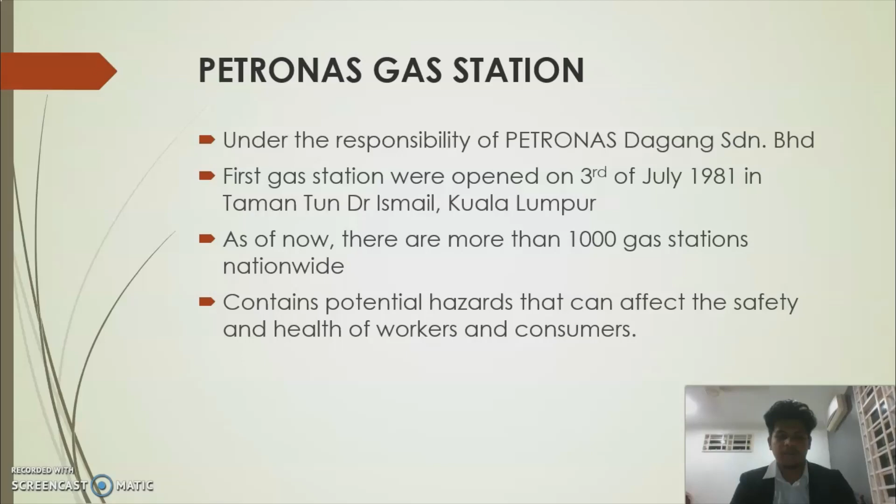Referring to the Petroleum Safety Measure Act 1984, Section 45 prescribes the procedure, equipment, and materials to prevent or extinguish fire in any place. The procedure to use the fire extinguisher is usually located at the body of the fire extinguisher: first is to pull out the safety lever pin, second is to aim the nozzle, and third is to squeeze the lever.

Referring to the Occupational Safety and Health Act 1994, Section 18 requires the equipment to be maintained and repaired. So the fire extinguisher is usually maintained once a year and replaced after more than 10 years of usage.

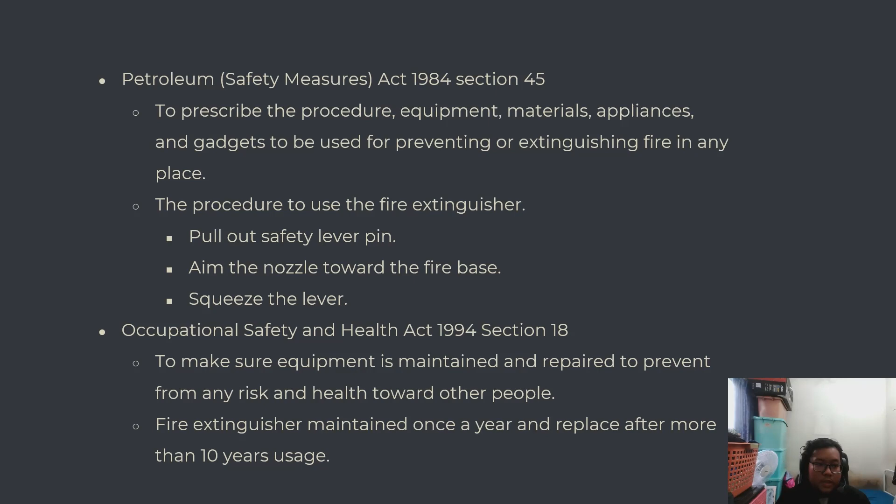Another facility required at the petrol station is absorbent. It is used to clean fuel spill or oil spill. It is designed to absorb hydrocarbon, as petrol and diesel are hydrocarbons.

Cleaning with water is not a proper way, as it contaminates water that flows into the drain, which can harm the environment. Second, it requires a huge amount of water, leading to wastage. Third, it spreads the spill to a wider area.

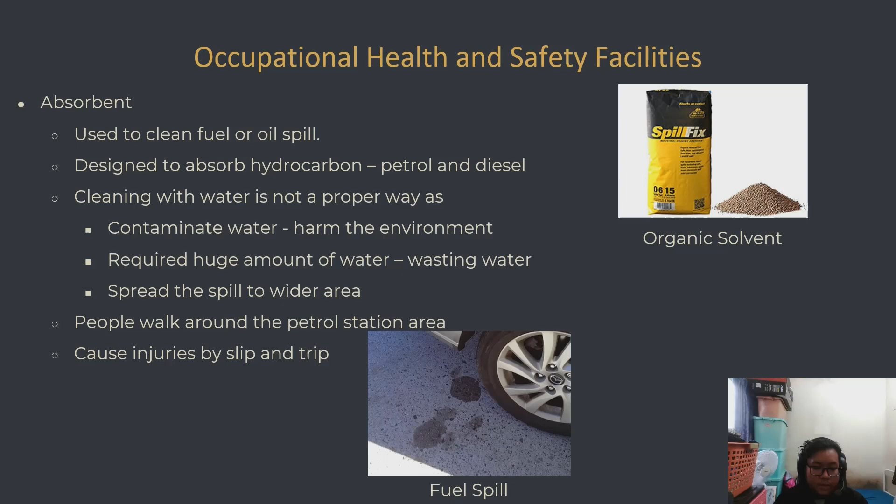So people will walk around the petrol station area from the filling station to the counter, which can cause injury by slip and trip. Referring to the Occupational Safety and Health Act 1994, Section 17 and 15, employer is responsible to prevent any risk to employees and needs to provide information and training to ensure their safety and health.

First, the employer needs to make sure the absorbent is available to be used. Next is that oil and fuel spills are cleaned regularly. Third is to train employees to deal with oil and fuel spills. Fourth is to provide tools and instructions to clean the spill.

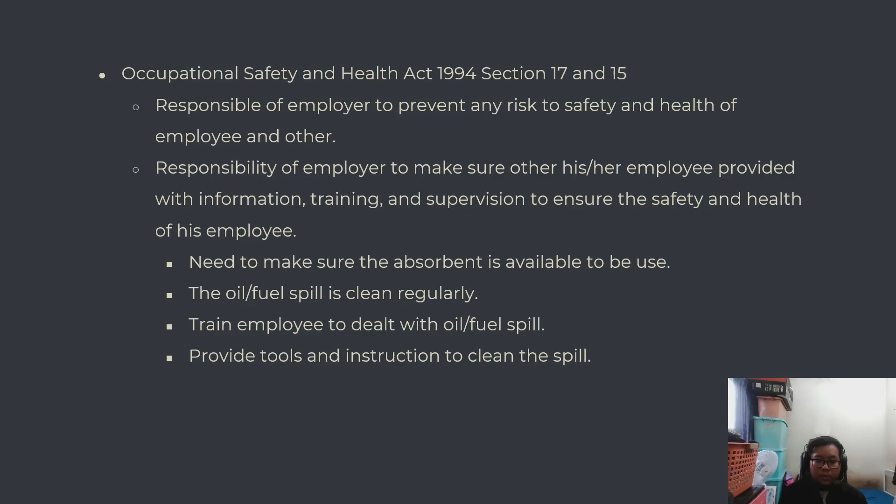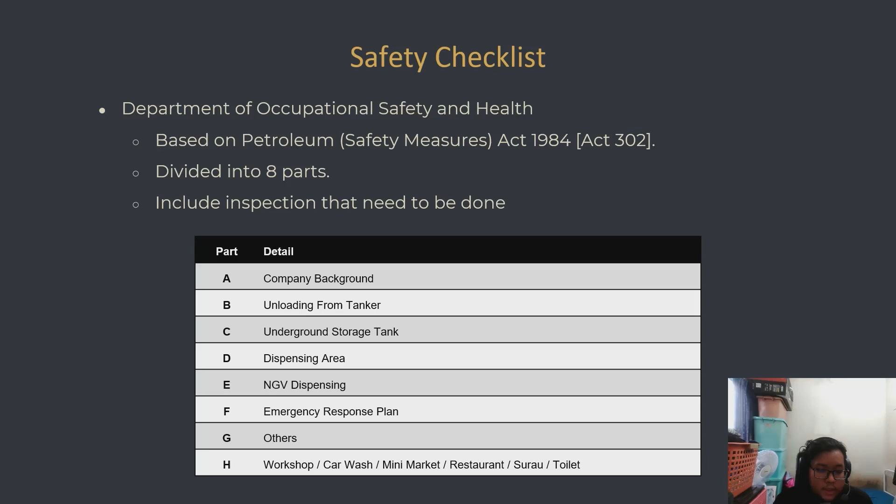A safety checklist, based on the Petroleum Safety Measures Act 1984, Act 302, from the Department of Occupational Safety and Health. It is divided into 8 parts, including the inspection that needs to be done on each part. This is an example of a safety checklist.

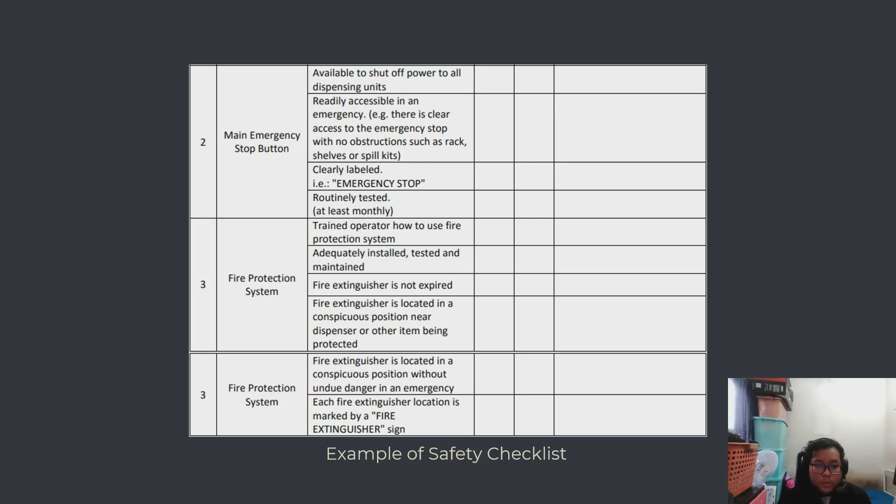For the main emergency stop button, it needs to be clearly labeled and routinely tested. For the fire protection system, operators need to be trained on how to use it, and the fire extinguisher must not be expired.

Next, the personal protective equipment required by employees at the petrol station. Based on OSHA 1994 Section 24, employees are required to use PPE.

First, PPE is S3 safety boots. It is designed for outdoor use, and the main advantage is to reduce the chances of slipping and tripping. The next is a reflective vest, which helps the employee stay visible and reduces the chances of being hit.

That's all from me. Thank you.

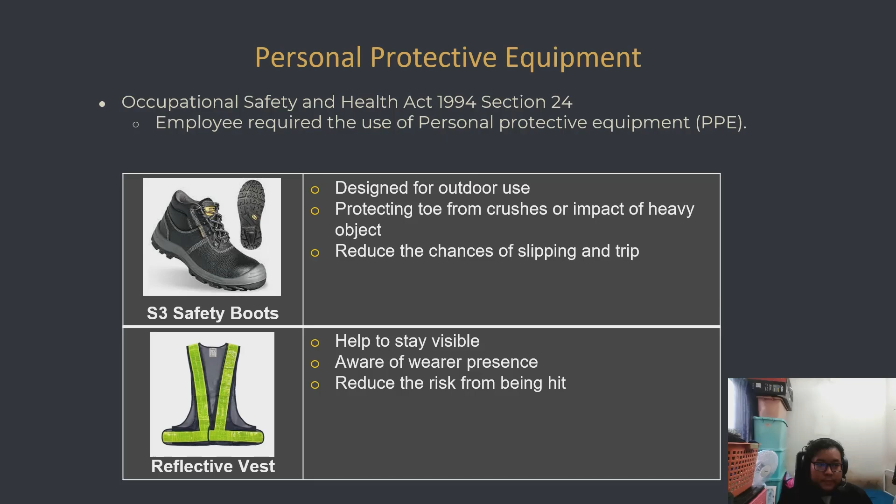Assalamualaikum warahmatullahi wabarakatuh. My name is Muhammad Nur Hafizi bin Khalid from Group A. Today I will present to you about Part B, type of hazard and prevention method.

As we know, our project is conducted at a petrol pump. The goal of hazard management and risk is to decrease and eliminate the risk of the job. So the oil and gas business is required to follow OSHA regulations to keep workers and customers safe.

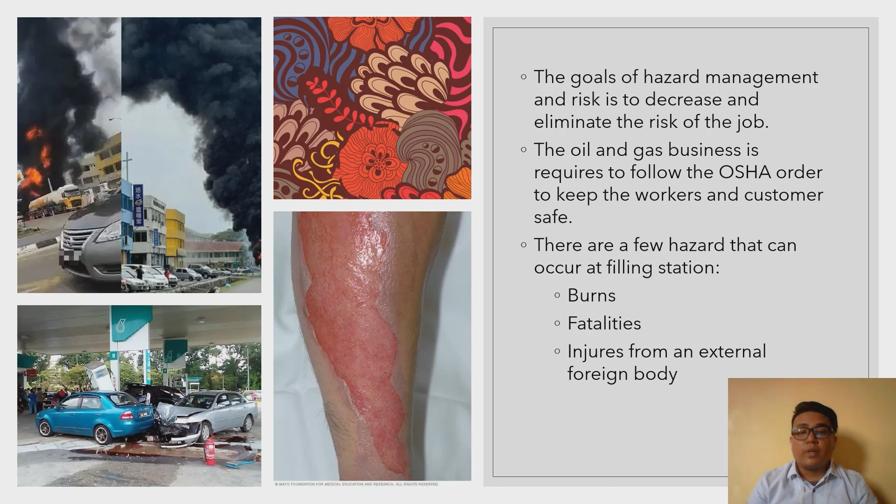There are a few hazards that can occur at the filling station. First is burns, fatalities, injuries from an external foreign body. Next, there are three factors for an explosion to occur: flammable substance, oxygen, and ignition source.

Each hazardous region is assigned a level or zone for monitoring and specification. Zone here means the amount of protection and precaution necessary. This is very important for us to understand. There are three zones: zone 0, zone 1, and zone 2.

Zone 0 is an area in which an explosive atmosphere is present continuously for a long period of time. Zone 1 is a location where an explosive environment is expected to develop on a regular basis, occurring as a result of repair, maintenance, and leaks.

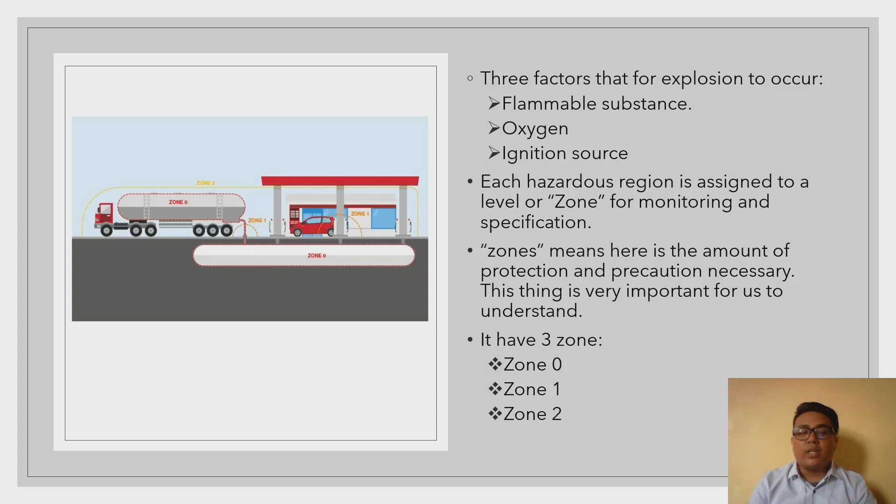Zone 2 is a location where an explosive environment is unlikely to happen during operation, but if it does happen, it's only for a short period.

Next, elements that cause a chain reaction. First is fuel leakage during loading and unloading. So when the process of unloading the tanker happens, unregulated vapor is released that might ignite into a flame and cause a chain reaction.

How to prevent this accident from happening? Install a sensor that will alert the worker if the tank storage is full, and put up signage or a reminder to avoid overfilling the tank.

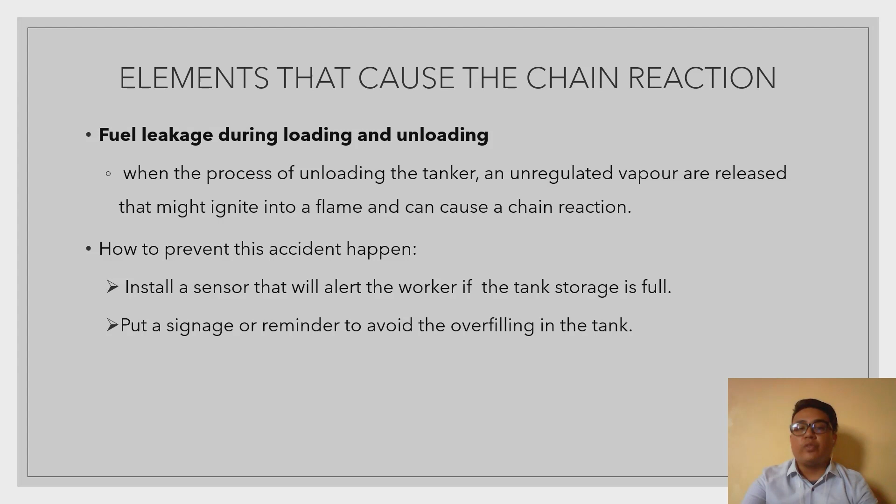Next is tank leaks and uncontrolled vapor, which will ignite a spark if these two sources are combined. So how to prevent this accident from happening?

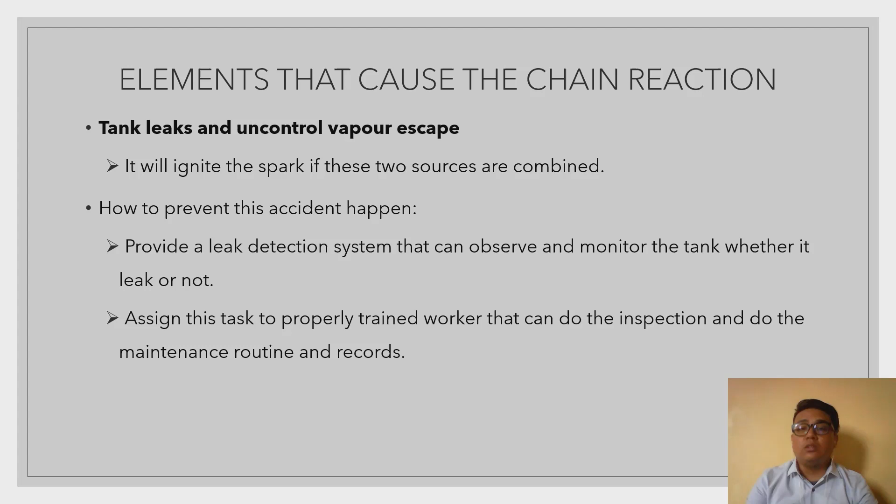Provide a leak detection system that can observe or monitor the tank for leaks. Assign this task to a properly trained worker who can do the inspection and perform maintenance routines and records.

Lastly is the carelessness of dispensing fuel. This mostly happens due to customers, based on risk assessment conducted by UTP. This case is about 49.28% higher than other cases.

So how to prevent this accident from happening? The engineer already designed a dispenser or pump with an approved standard, including label and signage. Next is the design of the dispenser.

Also, the dispenser position that matches the ergonomics of the human body. That's all from me. Thank you and Assalamualaikum.

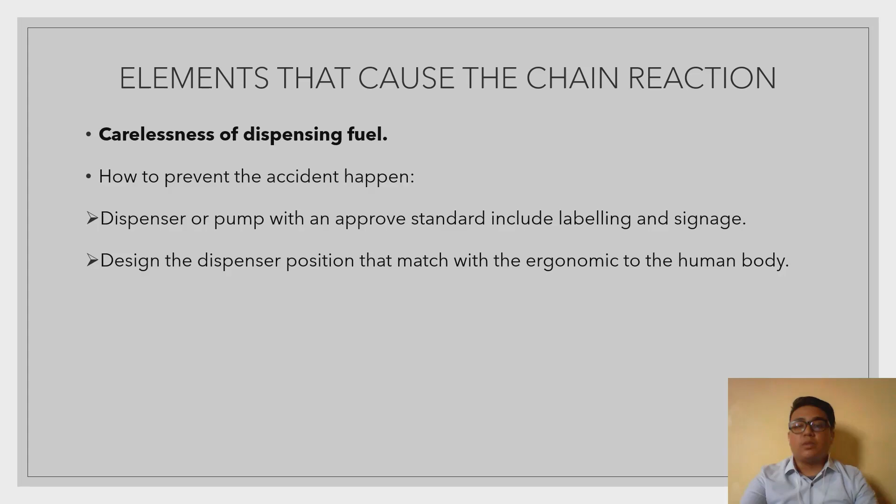Assalamualaikum and hi, my name is Nozari Sofia binti Azhar. Today I am going to present the slide of Part C, which is emergency procedure of an accident at the petrol pump.

For the first case, which is slip, fall and trip, it usually happens when there is oil leaking on the floor. The procedure is to get medical treatment. If the injury of the victim is light, perform first aid, while if the victim is severe, call emergency help to get medical treatment.

Then call and notify the supervisor about the accident that happened. Next, collect witness data by interviewing them. Then collect all the data of the accident, such as how the accident happened, why it occurred, and other appropriate information regarding the accident.

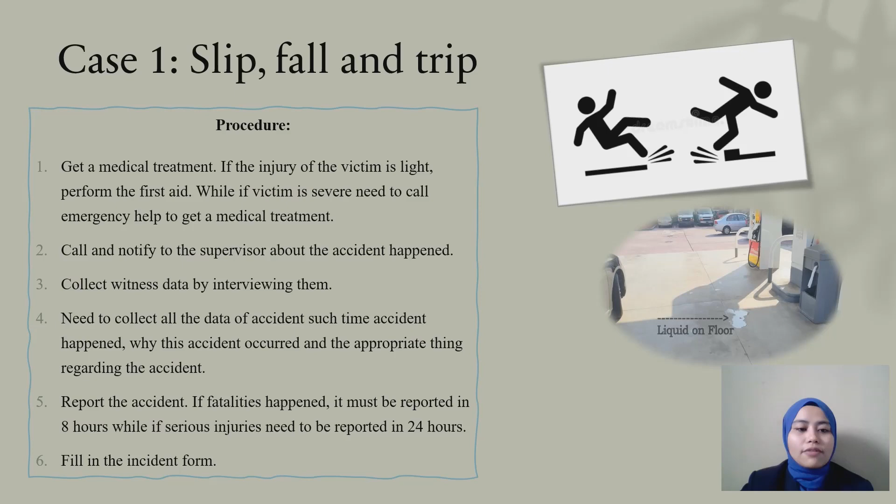Next, report the accident. If fatalities happen, it must be reported within 8 hours, while if serious injuries occur, it needs to be reported within 24 hours. Lastly, fill in the incident form.

For case 2, which commonly happens at petrol pumps, which is fire hazard, there was a fire when there was a static electric force that produced a spark. The procedure is to tell people about the fire, the place needs to be vacated immediately, and then immediately call emergency and inform them about the accident.

Next, if there are many people, isolate them in a safe area, which is the assembly point. Next, count all the employees and make sure everyone is accounted for. Then, if fire prevention equipment such as fire extinguishers exists, it should be used to slow down the spread of fire. Then report the accident.

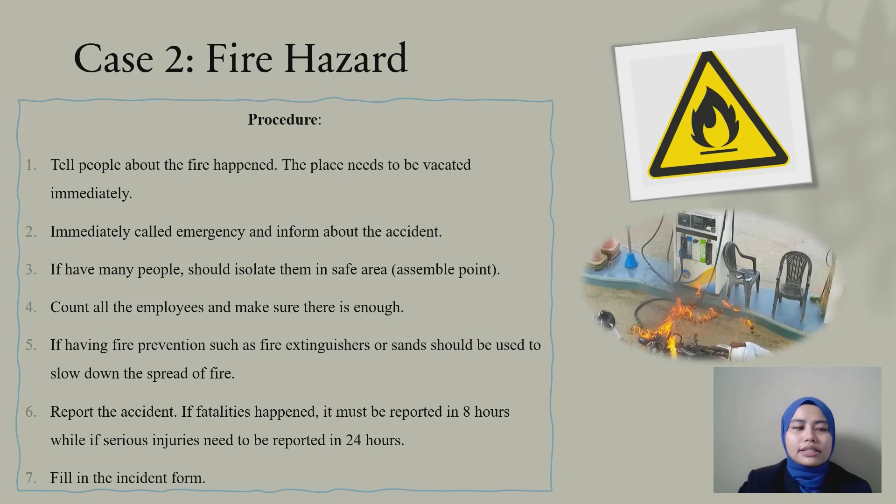If fatalities happen, it must be reported within 8 hours, while if serious injuries occur, it needs to be reported within 24 hours. Lastly, fill in the incident form.

The last case is hit by vehicles. The procedure is do not move the victim for fear of fracture, and then call emergency for help. Next, check if the victim is breathing or not, and then perform CPR if the victim is unconscious.

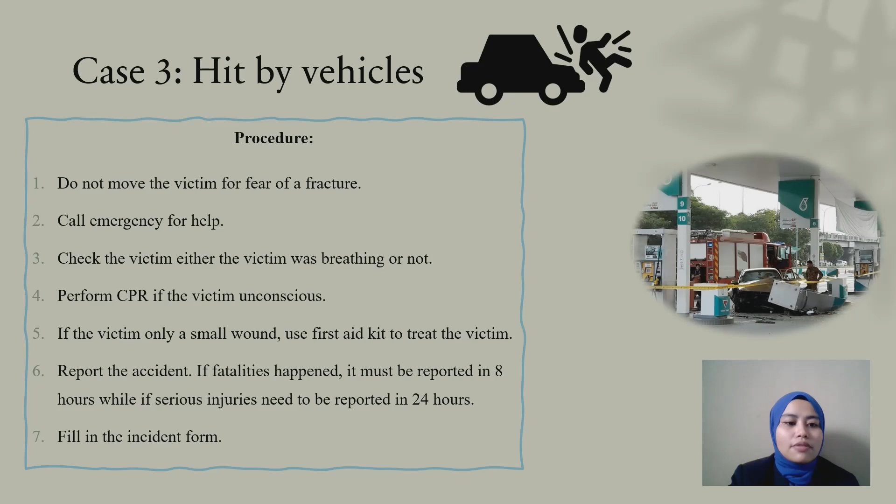If the victim only has a small wound, use a first aid kit to treat them, and then report the accident. If fatalities happen, it must be reported within 8 hours, while if serious injuries occur, it needs to be reported within 24 hours. Lastly, fill in the incident form.

So this is the incident form that needs to be filled out when an accident occurs. That's all for me, thank you.

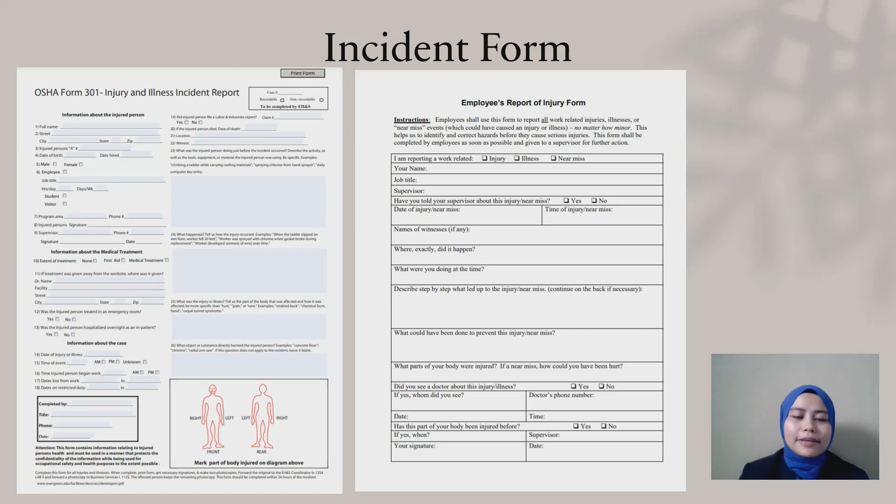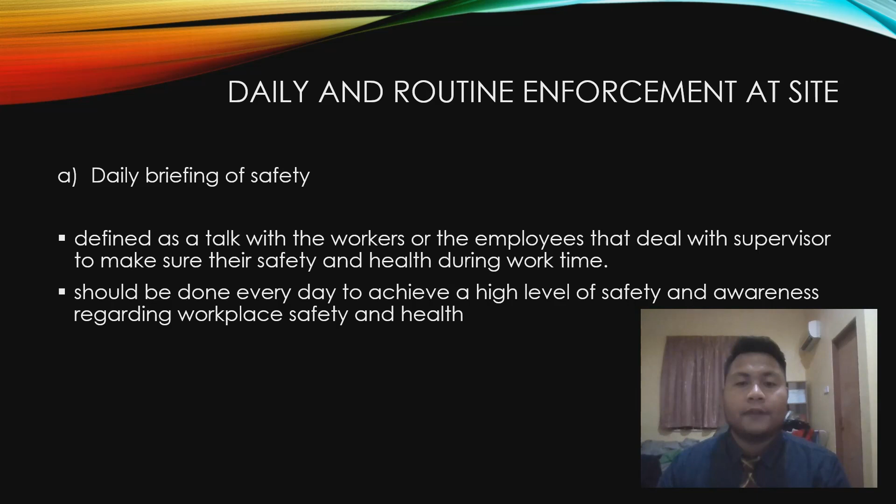For the first topic, daily and routine enforcement at petrol pump stations, there are two main points. The first is daily briefing of safety, defined as a talk with the workers or employees conducted by the supervisor to ensure their safety and health during work time. This briefing should be done daily to achieve a high level of safety and awareness regarding workplace safety and health.

The next topic is safety procedure in petrol pump stations. The safety procedure is defined as a step-by-step strategy for carrying out a work operation. This is utilized when a departure from the protocol might result in injury or an accident.

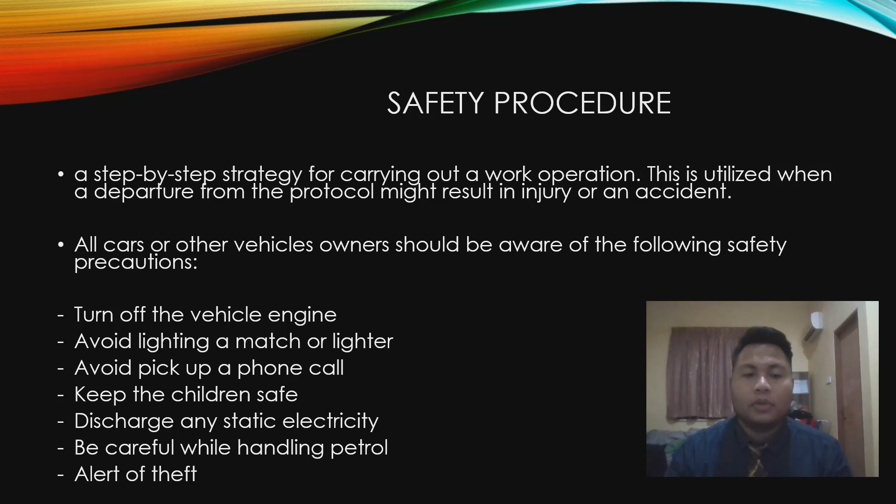While in and around a gas station, all car or other vehicle owners should be aware of the following safety precautions. The first one is turn off the vehicle engine. Next is avoid lighting a match or lighter. Next, avoid taking phone calls. Next, keep children safe. Next is discharge any static electricity. Next, be careful while handling petrol. And lastly, be alert for theft.